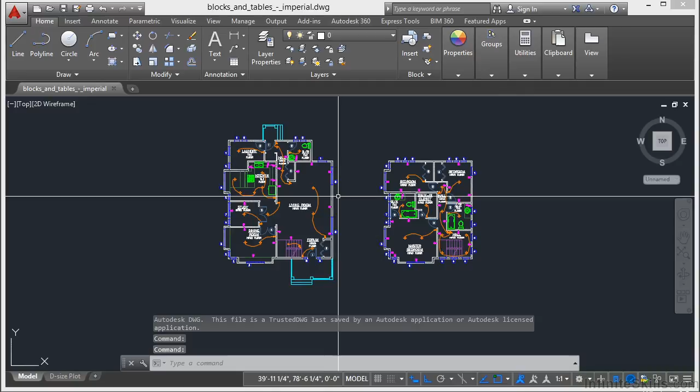When grips are turned on, you can select the objects that you want to manipulate before entering a command. You do that by selecting an object. So if I select this arc, I can see that it has four different grips, and the grips are those blue boxes.

To use a grip mode, you just select the grip by clicking on it. That turns it into a hot grip, it turns red. When I do that, I'm able to manipulate that object in specific different ways. Right now my ortho is turned on, so it's constraining what I do. Essentially, this is executing the stretch command on the endpoint of this arc. I'm going to turn off my ortho, so you can see here I'm moving that vertice or endpoint of the arc.

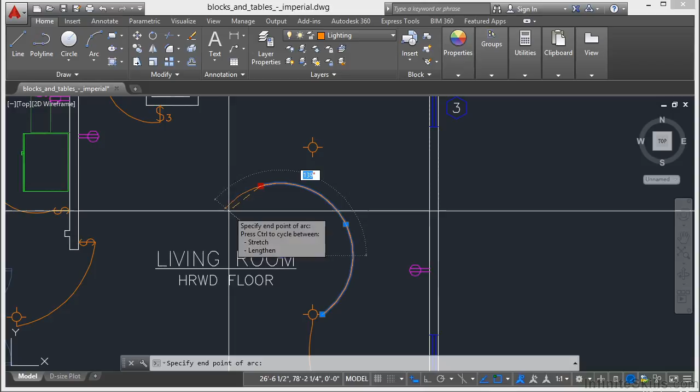Now some grips, most of them in fact, will have different options. If you just hover over the arc, don't click it yet, don't make it a hot grip, just hover over it, you'll get some options. On the endpoint of an arc, I have two, stretch and lengthen. We just saw the stretch, but the lengthen option allows me to make the arc longer or shorter. I can type in the distance, type in an angle, or just left click somewhere.

On the quadrant of an arc, I have two options: stretch, which uses the stretch on that midpoint, or radius, where I'm shrinking the radius and the center point stays the same. Now the center point grip of an arc is just a move command.

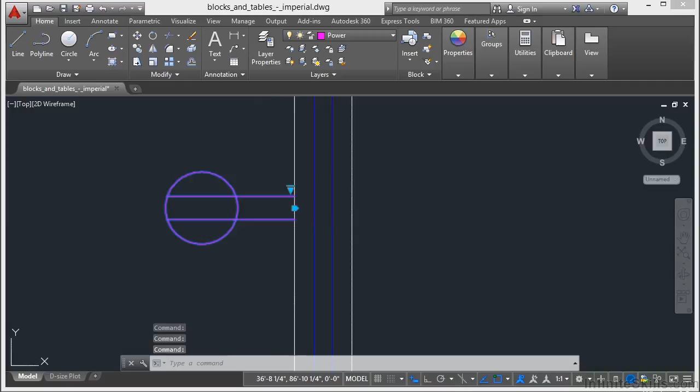Now a lot of different objects will have very similar types of grips. This is a block, it has some grips. This is specifically a dynamic block, which allows it to do certain things. That will depend on the block itself.

If I have a line, I select it, I get my hot grips. The endpoints again are just like with the arc, I can stretch it and lengthen it. It's a stretch at the same time there, and then I can do just a lengthen, shorten it or make it longer. The midpoint is just the move command again.

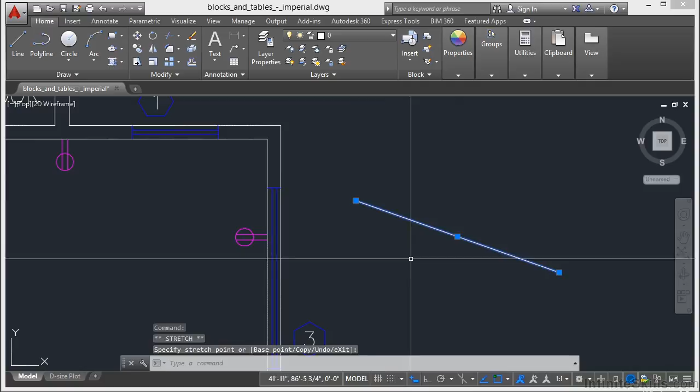Now if I have a circle, there aren't many different types of grips on a circle. I have my quadrant grips, which will just change the radius, or I have my center, which will allow me to move it. Different types of objects will have different types of grips, so it's really cool to find out what they are.

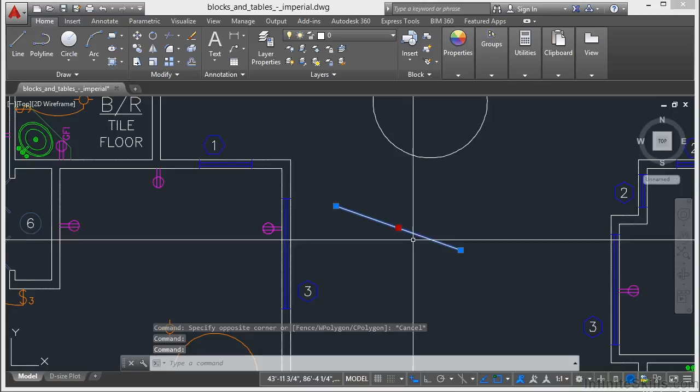Now, you can select multiple grips at a time. So if I select this line, select the midpoint and the endpoint, this becomes a move command, and it's going to keep these relative to each other. It's kind of like still doing just the center point.

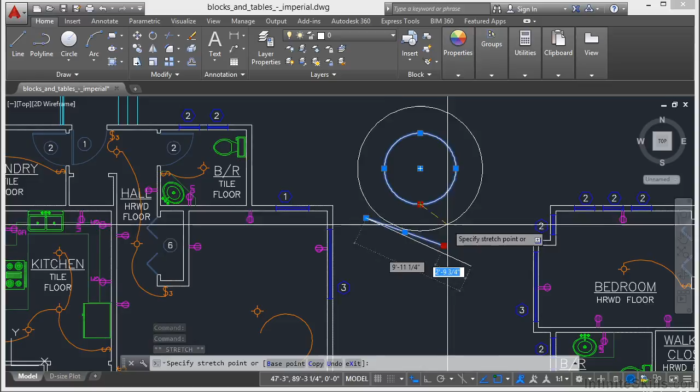But if I select another object, and I select by holding down Shift, just that one grip, as well as that grip, I'm changing both of them relative to each other, according to how I move it. So if you need to keep objects like this line right here at the same distance apart, you can grip edit multiple objects at a time. Keep that in mind as something you might want to do. Hold down the Shift key first, select your grips, and then you can move both items accordingly.